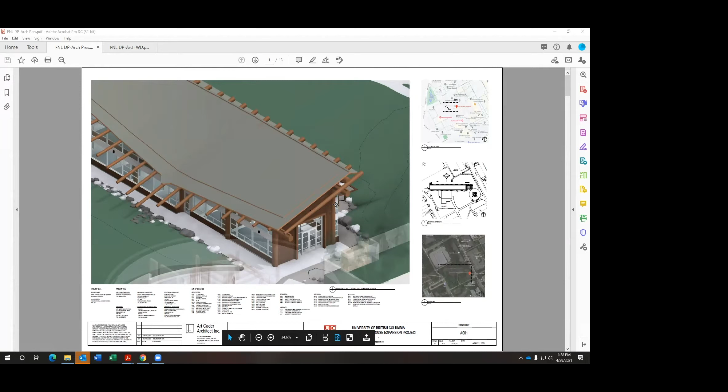The image on the cover page here is focusing on the addition. The Longhouse is quite a larger structure. The existing Longhouse was built with an expansion in mind, and on the east end of the building there's an exposed log structure, post and beam, that was intended for the future expansion, and that's what's led to the project we're currently looking at.

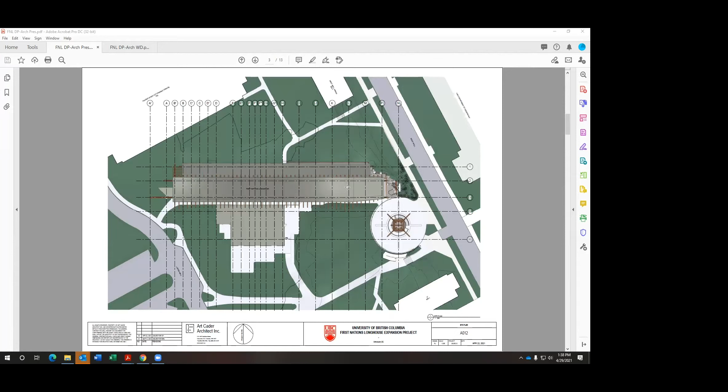And so that is the roof plan showing that area. Here we've got the comparison between the two, the existing and the new. The existing Longhouse with the exposed structure and the expansion, which is intended to carry the existing lines as much as possible.

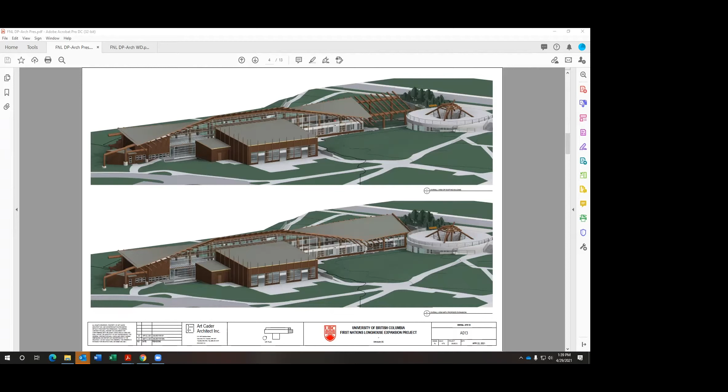The plan of the expansion area has two offices, one of which is a counselor room, a washroom, storage, and corridor. The main rooms are a meeting room with a multi-purpose room and an operable wall between the two, so that both could be used simultaneously to offer flexibility.

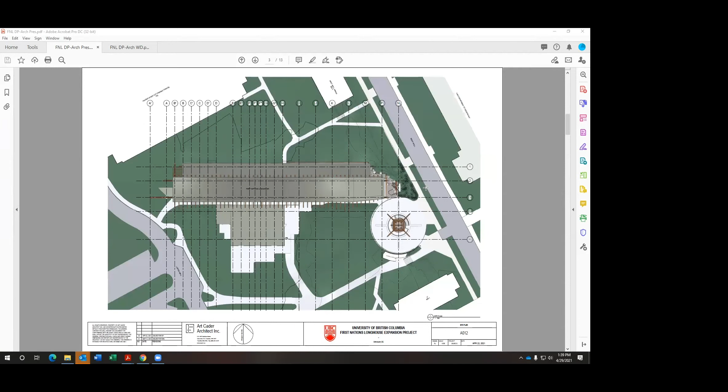The one thing I didn't mention was that the existing facility has a water feature on the east wall, which you can kind of see here. It's right there. And the multi-purpose room that I just described opens up to that water feature area. It's a river rock base and textured water wall. Chris from PFS will describe some of the landscape features in this area.

So we looked at the way both spaces work together and also separately. That was key to the layout.

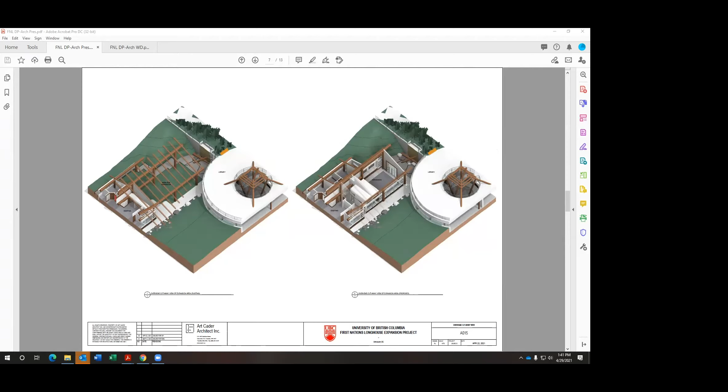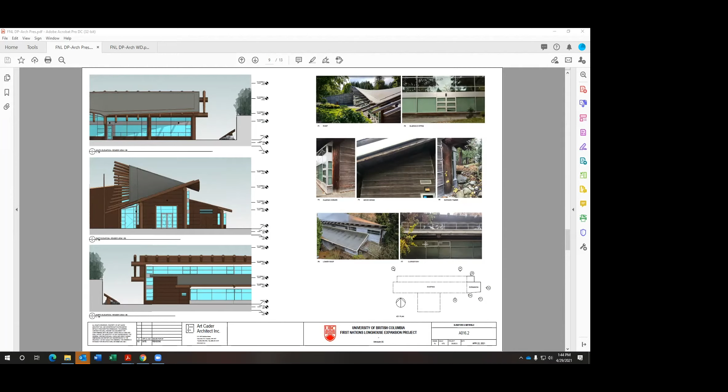So another aspect to this project is we've looked at the railing of the library. We've got a couple of images here that show we're addressing the climbability non-conformance of the existing railing. We're proposing to put a perforated metal panel on the inside of the horizontal rails to eliminate the climbability aspect of the railing.

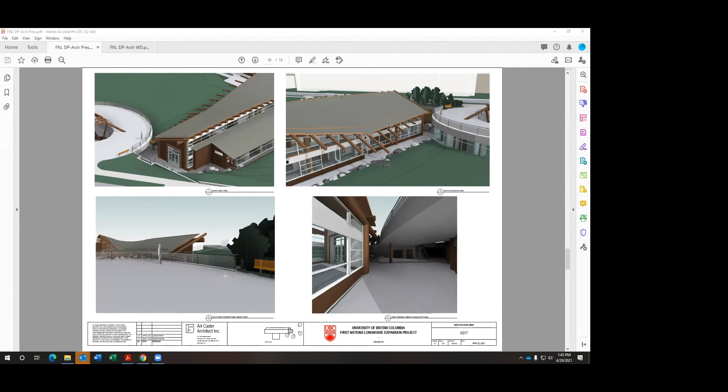Now you can see that there. The interesting thing is we're proposing that all that be done with the existing railing in place, so we won't be removing the railing in that design.

So you have a view of the courtyard with the water feature, looking back at that same courtyard from the library overhang, and then the view of the mechanical room, and the window into the access from the multipurpose room. These are some shots inside the multipurpose room with the divider wall open and closed. Here's the view looking towards the water feature.

There's some AV infrastructure that's going to be part of the project for digital monitors on the north wall. Here's a look back at the meeting room. I was describing earlier the idea of rooms within rooms, and that's what we were working with here—this is intended to be like a space within a space, and the larger space continues on, which is what we're trying to achieve.

So with the wall closed, the meeting room is behind that. With the wall open, this space becomes accessible to the multipurpose room.

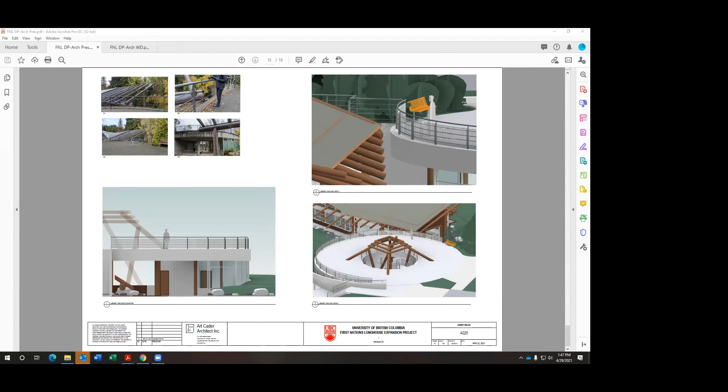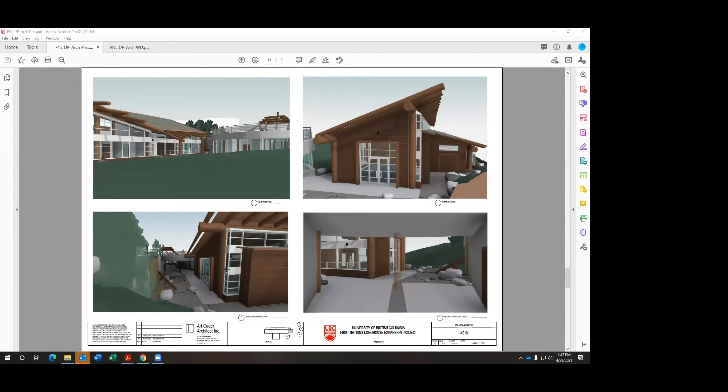So what I could do is go into the working drawing plans if you like, or we can skip straight to landscaping and see how much time we have left over. Yeah, I think we'll switch to landscaping for now, and we can come back if there are questions—more detailed questions. Okay, I'll pull up the landscape plan.

And Chris, are you there? Yeah, yeah. Okay, just let me know if you want me to flick from sheet to sheet. Why don't you go to the next sheet? We'll come back to the access component at the end.

So the main objective for the landscape design of the expansion is primarily the preservation and restoration, in some cases where needed, of the existing landscape that the existing facility is located in. That's the most important aspect of the landscape treatment. The highest order is the preservation and protection of the existing arboretum that the entire facility is located in—I believe it's called the Davidson Arboretum—so anything we do needs to ensure that all trees in the arboretum are protected. That's at the top of the list.

Another element of preservation is the existing water feature, which will remain basically untouched, so any disturbance to it during construction will need to be restored to its current configuration. Another important element for preservation is the toe of the existing north slope, a forested slope that defines a bit of a backdrop to the space.

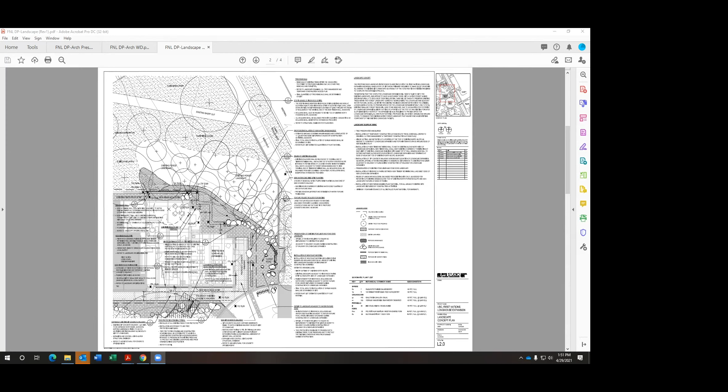This space reads as the main front of house, a public space. Features include one large feature boulder usable for seating that engages the walkway, and a subtle but rich border of irises creating a screen between the walkway and the water feature, symbolic of water—a nice planting touch for that space.

The second space, the back of house, is really a maintenance space. As you head around the corner of the expansion along the north edge, it's primarily for maintenance access to the mechanical room, with a river rock strip along the north side of the building for maintenance access to the facade.

The paving there is intentionally a coarse river rock surface that's not easy to walk on, signaling it's not a place for the public, and the slope retention there is more basic and utilitarian—a timber wall—again signaling this is not a public space with a lot of character.

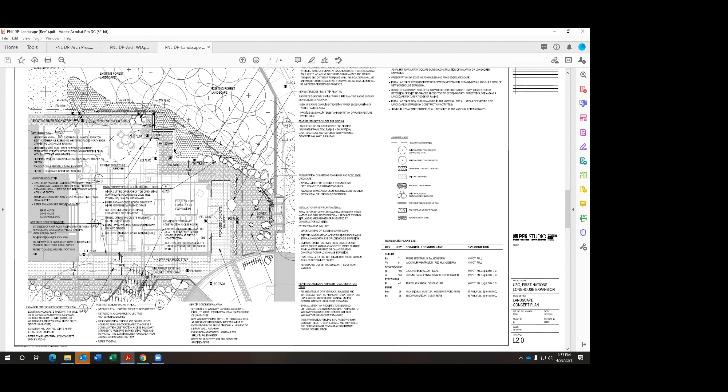It's really meant to be diminished in its character and appeal as a space to activate. That's an important differentiation between the two spaces. That pretty much sums up the treatment around the expansion.

With regards to the Arboretum, if we flip back to the first page, we have a plan for the rest of the site including a temporary construction access route. We studied a couple different routes and found this made the most sense. It entails full protection of the Arboretum with fencing all around so no construction activities can spill beyond the main route, including all other edges.

This route utilizes part of an existing paved walkway, which means we can run the road through there without damaging the Arboretum. The remainder will need a detail endorsed by the university and the arborist, with tree protection fencing on either side and probably a resilient surface—bark mulch perhaps, up to a foot thick—as needed to protect root zones, along with any aerial protection of trees.